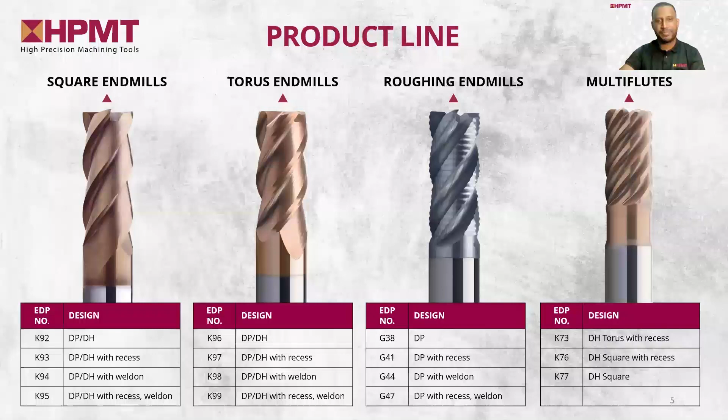This NiTiCo 45 is ideal for machining resilient superalloys, which fall under the S material group, particularly nickel-based alloys such as Inconel, Haynes alloy, Waspaloy, and Monel, as well as challenging and durable stainless steel and titanium material. Optimal results are achieved within a hardness range of 36 HRC to 52 HRC. Therefore, for any superalloy or other materials like PMK falling in this hardness spectrum, HPMT suggests utilizing this NiTiCo 45 program for superior performance.

This material, which I have mentioned a while ago, can be found in various industries, but we have narrowed down to the industries we believe use it the most. The most common is in the aerospace industries, for production of aircraft turbojet engines, particularly the discs, blades, and engine casing. For defense, in production of gas turbines, which can be found in naval vessels or patrol boats, particularly the production of propeller blades and submarine fittings. In energy, for production of gas turbine components such as scrubbers and also heat exchangers. It also can be found in medical industries, in production of joint implants, fixation screws, bone plates, knee and hip implant components.

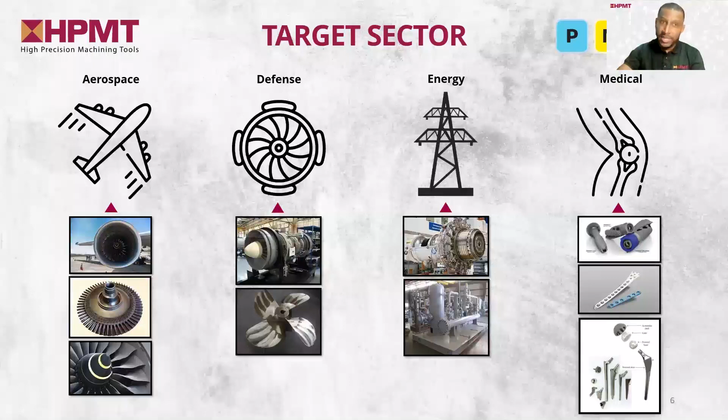Basically, all four materials are being selected, with stainless steel leading the poll. I'm happy to inform our internal testing is done based on Inconel 718 material. So do stay tuned, as we will come to that part later on.

Next up, I'll pass to my colleague Nisha, where she will share what makes this NiTiCo 45 different by diving deep into the features of the tool. Over to you, Nisha. Thanks, Mark. Hi everyone, I'm Nisha from Product Management. We'd like to explain the main features and benefits of our hero product for today, the NiTiCo 45.

Features and benefits are very important criteria to further enhance the tool's performance and efficiency in machining operations.

As you can notice, the figure on the left has equal pitch and the figure on the right has differential pitch. The first feature in this NiTiCo 45 will be the differential pitch, known as DP. Differential pitch simply means that the pitch is varied between the blades. This feature improves performance and reduces chattering during machining by breaking the resonance. Overall, differential pitch leads to enhanced surface finish and longer tool life, resulting in a smoother cutting process.

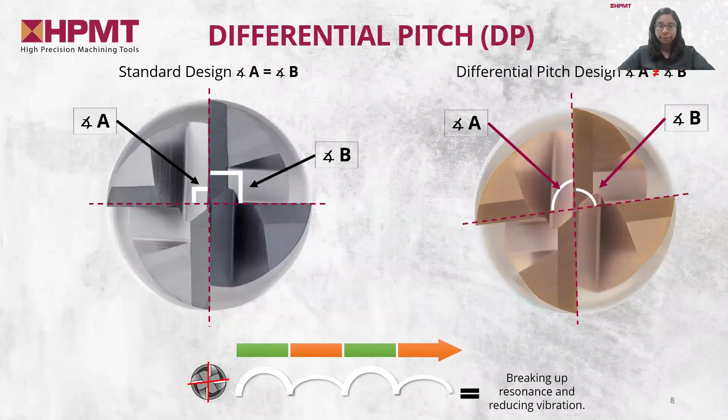Next, we will move to the next feature, which is the differential helix, DH. Jet, do you know the benefit of having DH? Well, from my understanding, differential helix or DH means there are different helix angles in one single tool. It also means that the helix angle for the second flute will be different from the first one.

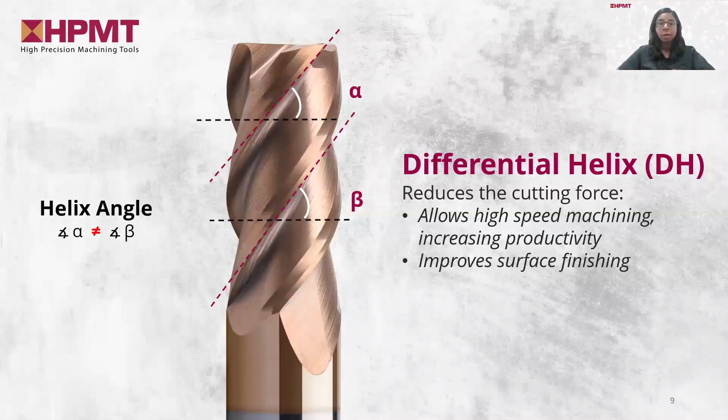Thanks, Jet, you are correct. Differential helix basically means that the helix angle varies along the length of the flutes. This feature helps in chip evacuation to prevent chip congestion, leading to higher efficiency in the cutting process. Differential helix also helps reduce chattering by breaking the resonance, promoting a stable cutting operation. Lastly, higher tool life can be achieved by distributing the wear evenly across the cutting edges.

Next, we have the ideal cutting edge, or internally we also call this feature the fake margin, because we adopted the eccentric grinding process to leave a small land width of about 100 microns at the cutting edge. This ideal cutting edge land width is larger than a perfect cutting edge. The ideal cutting edge reduces cutting force during machining, leading to stable cutting operations. The smooth and precise ideal cutting edge helps achieve a high-quality surface finish, and also helps prolong tool life and enhance durability.

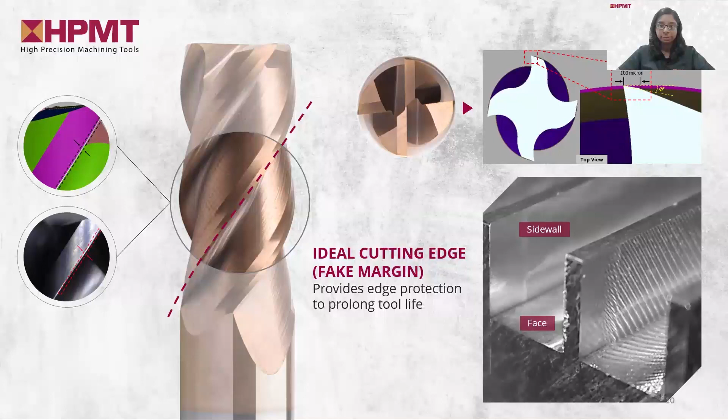NiTiCo 45 also comes with a newly improved coating formula known as B0909. This newly improved coating formula comes with higher thermal and wear resistance, and also promotes smoother chip evacuation.

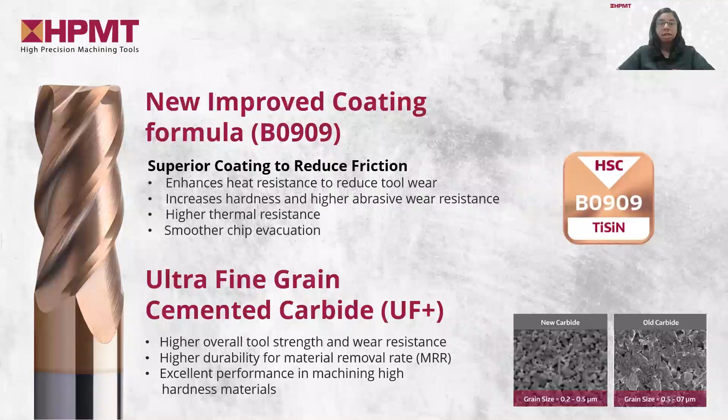Lastly, the NiTiCo 45 is made up of UF plus material. For those wondering, UF plus means ultra-fine grain cemented carbide. This carbide material comes with higher tool material strength and wear resistance. Most importantly, it comes with higher durability for material removal rate, which is a dream for all machinists. That's all on the NiTiCo 45 features and benefits.

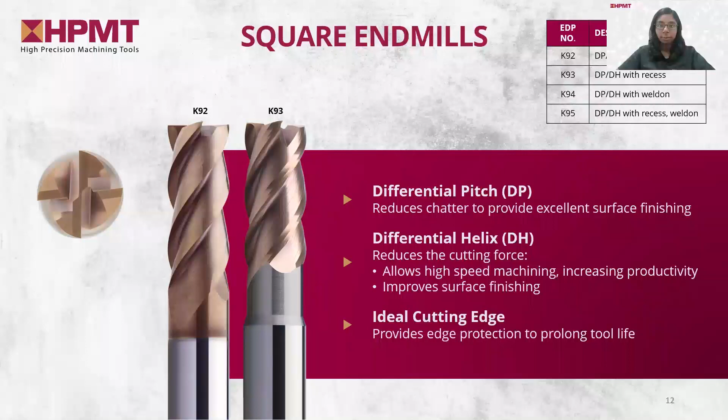Next, I will introduce the NiTiCo 45 newly launched item types. Basically, NiTiCo 45 will be introduced in 3 types. The first type will be the square end mills, which consist of 4 EDPs: K92, K93, K94, and K95. All the mentioned products are equipped with differential pitch, differential helix, and ideal cutting edge.

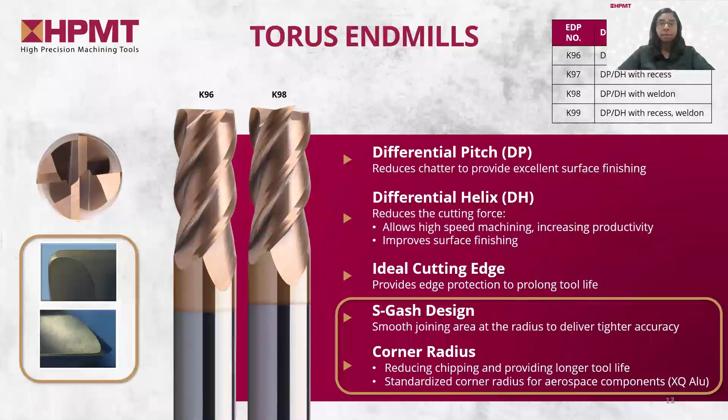The next tool type will be the torus end mills, also consisting of 4 EDPs: K96, K97, K98, and K99. These products are also equipped with differential pitch, differential helix, and ideal cutting edge, and are further enhanced with the S-gash design, a specialty to deliver tighter accuracy. The standardized corner radius for aerospace components helps reduce chipping and lengthens tool life.

Multi-flute will be the last tool type in NiTiCo 45, consisting of 3 EDPs: K73, K76, and K77, which come with 6 or 7 flutes. The multi-flute tools are equipped with differential helix only, further enhanced with the S-gash design and high helix angle. Better shearing and surface finishing with excellent chip evacuation are the benefits of having a high helix angle.

As predicted, side milling is the most common machining strategy when it comes to super alloy material. Okay, I'm not going to take any more of your time. I will pass on to Jet. Jet, take it away. Right, thanks, Mark. You can rest a bit for now. Let me start sharing our tool test results.

So here, you can see that our tool test processes are categorized into 3 stages. The first stage is more on internal prototype testing at the initial stage only, while the second stage will be the final product comparing directly with all the other competitors for both 4 flutes and multi-flute tools. Lastly, stage 3 will be a very fierce comparison with very aggressive cutting parameters between HPMT and the best performing competitor from stage 2. We will show you the results in the next slide.

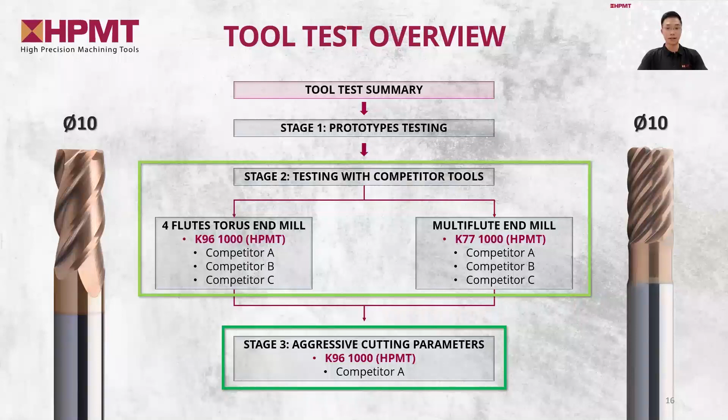Before that, I would like everyone to pay attention to the details and cutting parameters here, because it will be slightly different later in another stage. So basically, for the first test in stage 2, the material that we use here is Inconel 718, which is also widely considered a very common material in the target sector that we mentioned previously. Please be noted that our comparison coverage is wide, as we include both Europe and Asia competitors.

We will not disclose who they are, but what we can tell you is that competitors A and B are well known in Europe, and competitor C is well known in Asia. Due to multiple sites being involved here, the cutting speed, feed rate, and other cutting parameters that we selected are based on standard conventional cutting parameters that are considered quite common among all the competitors. As for the coolant pressure, it is controlled at 15 bar here. The machine that we use for the tool test is Hwacheon, a 5-axis CNC machine.

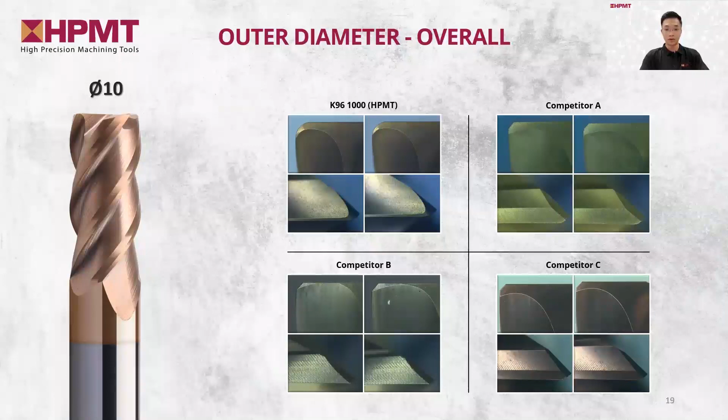Got it. Thanks for the explanation, Jet. Okay, great. So in order to compare the test result, we will always start with capturing images of all the tools before we do machining. Now, let's have a look at the condition of the tools after machining on Inconel 718.

As you can see, the difference in terms of performance is very, very significant. Competitor B is already broken at the 5th program, which is about 13883 millimeters squared covered. Competitor A and C already have very heavy wear, while HPMT's K96 is still looking great.

Here, this is also the top area, just that it is another side of it, which we call gash land. Based on the images that we obtained, the result and condition of the gash land are the same as well.

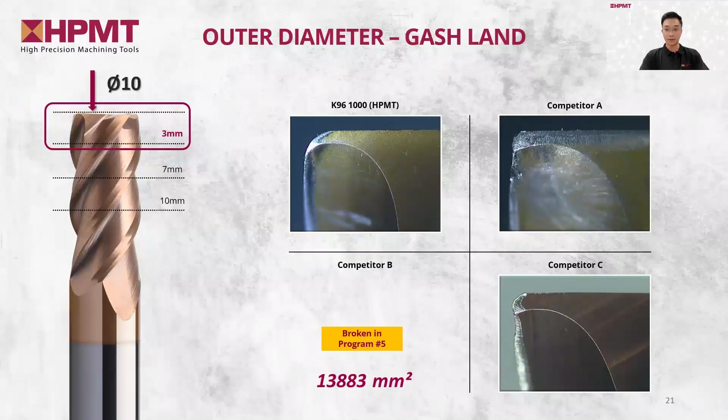These are the images that we observe on the bottom area. Before I continue, do you guys know why we separate them into 3 areas? Perhaps because we tested it for 3 times? Not really, Nisha. It is actually because we are aware that some might have doubts about the consistency across the entire tool area. So during the tool test, we observed all 3 areas, including top, middle, and bottom.

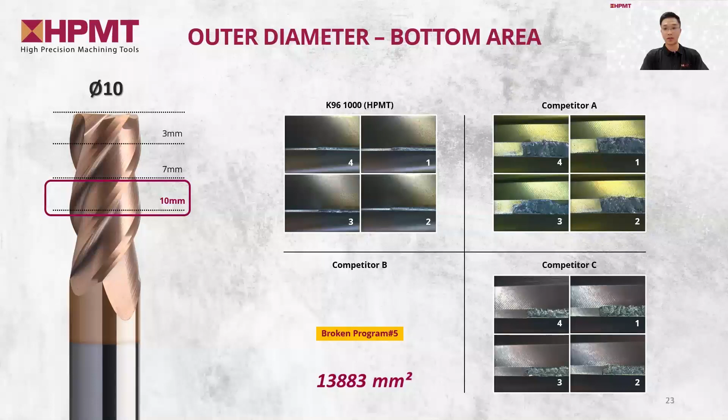So here I would say that we are very confident that after comparing them, HPMT's K96 is still the best one. As you can see, the wear difference is pretty obvious and also significant.

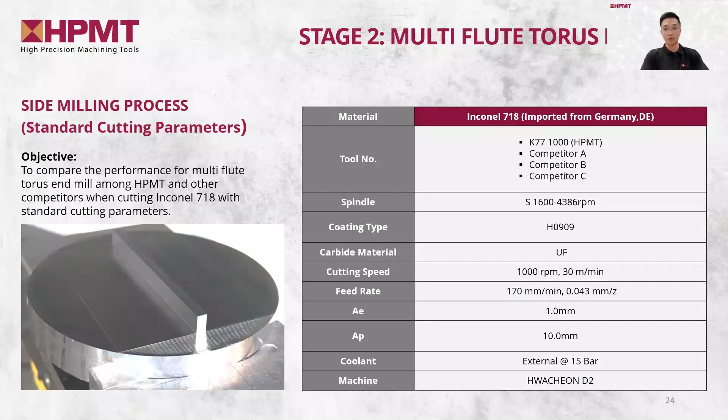Other than the torus end mill, we will also show the test results of the multi flute end mill. This is basically similar to the first test, but just with a different tool type. All the cutting parameters and machine settings remain the same.

Same machining program here: the first tool will cut from area A1 to A5, while the second tool will cut from B1 to B5, and the same goes for the third and fourth tools. Here are the images that show the condition of the tools before machining.

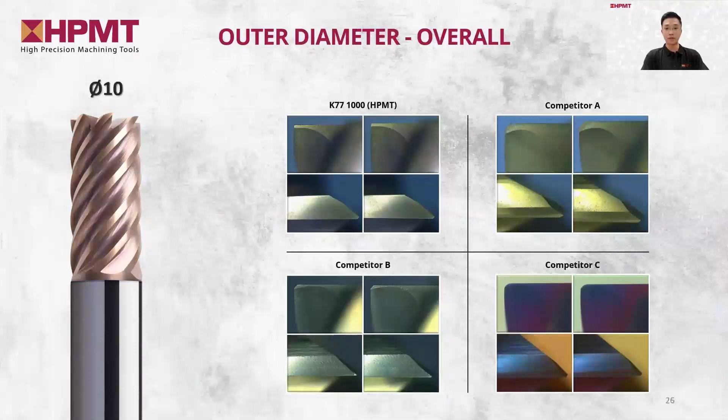In the next slide, I will review for all of you whether the performance is as promising as the 4 flutes we shared just now. All right, time to review its actual performance.

As usual, we will start with the top area first. As you can see in the top area, the difference in performance is still significant. Competitor B is already broken in the 3rd program, covering about 7986 millimeters squared. Competitor C's tool is already broken in the 1st program, only about 2519 millimeters squared.

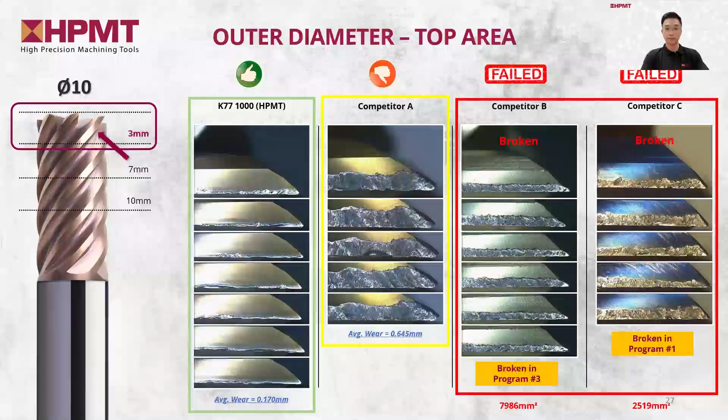So I would say that competitor A is having heavy wear, while HPMT's K77 is looking great with just some slight wear on the cutting edges. Same as what I mentioned before, this is also the top area, just that it is another side of it which we call gash land.

Based on the images that we obtained, the result of the condition of the gash land is the same as well.

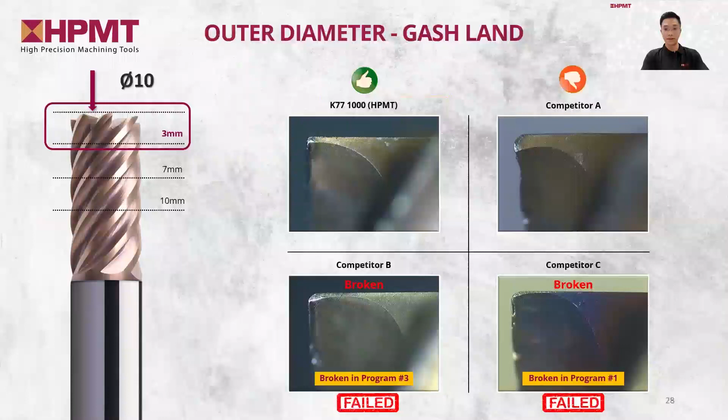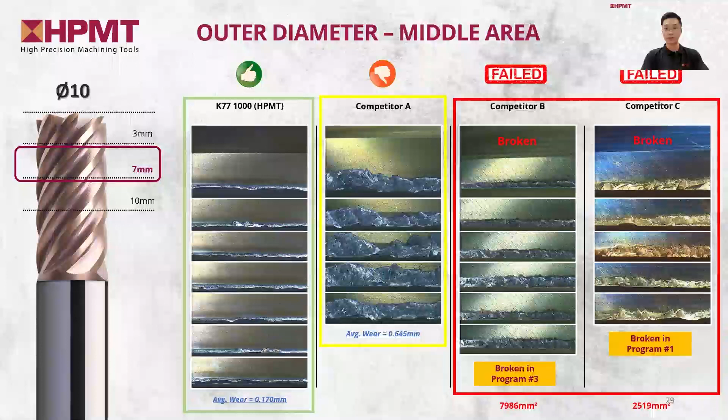In terms of the middle area, we can see that the result is the same as the top area because both competitors B and C are already broken. Competitor A has heavy wear, but HPMT has just acceptable wear condition and is able to continue machining. Same goes for the bottom area. It is still very obvious that HPMT's K77 multi flute end mill is the best after comparing among competitors.

Thank you for sharing the tool test report, but the result seems too good to be true. Is it because you're using a conservative cutting parameter, or a cutting parameter that suits HPMT tools? Yeah, Mark, I can tell that you are definitely paying attention. That's also why I requested everyone's attention early on.

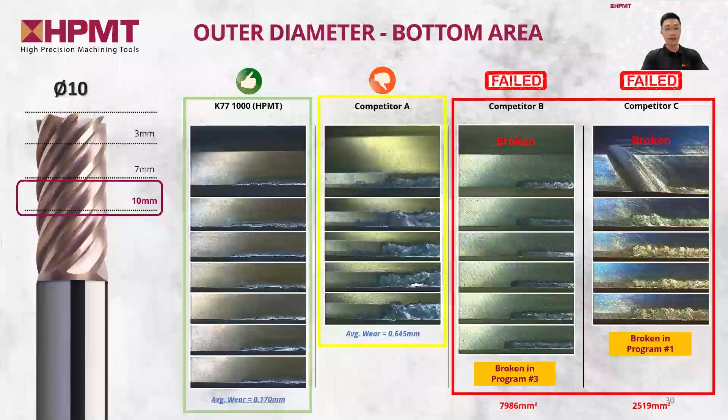Okay everyone, so from what I shared just now, we were actually only comparing with the same conventional cutting parameters that we concluded after comparing with all the competitors' conventional cutting parameters. But worry not, as in the next slide I will share more on the next stage of our tool tests. Before that, Mark, do you see any difference in stage 3?

If I remember correctly, in the previous test the cutting speed was 1000 RPM and 30 meters per minute. But here it's 1590 RPM and 50 meters per minute. That's a whopping 50% increase.

Yes, you are correct. So not only comparing with conventional cutting parameters, we also include aggressive cutting parameters to test. The reason is we understand some of you might have concern or doubt on the capability and performance of our tools under more aggressive cutting parameters. So in this stage, stage 3, we carry out two tests with very aggressive cutting parameters, and we will show you how they perform under this condition.

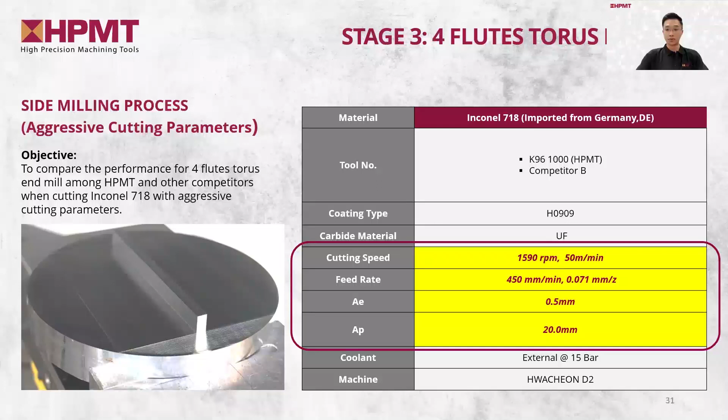As you notice, the cutting speed here increased from 1000 to 1590, and the feed rate increased from 170 to 450. But not only that, the cutting depth, or what we call AP, increased from 10mm to 20mm, which is exactly 2 times than before. So in other words, we are utilizing almost the entire cutting length for this tool under these aggressive cutting parameters. The machining concept and process all remain unchanged from previous tests. The only difference is that we changed it to the aggressive cutting parameters.

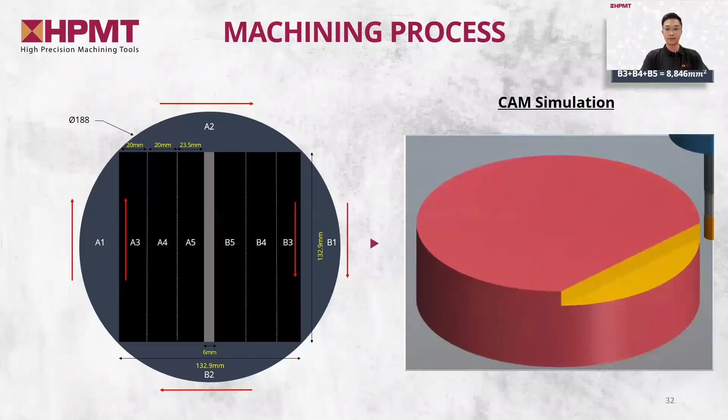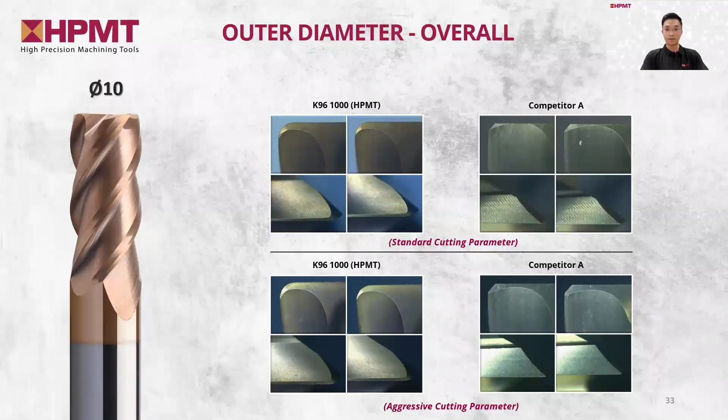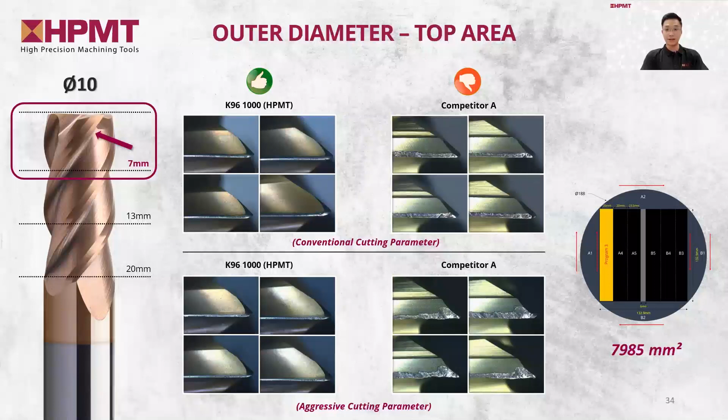For the first part, we are going to show the images and results taken before the tools are broken. As you can see from the top area, competitor A's tool has very heavy wear, while HPMT's K96 still appears to be able to continue further. Competitor A's gashland area is heavily chipped, while HPMT's K96 is still in good condition, even after all this aggressive cutting process.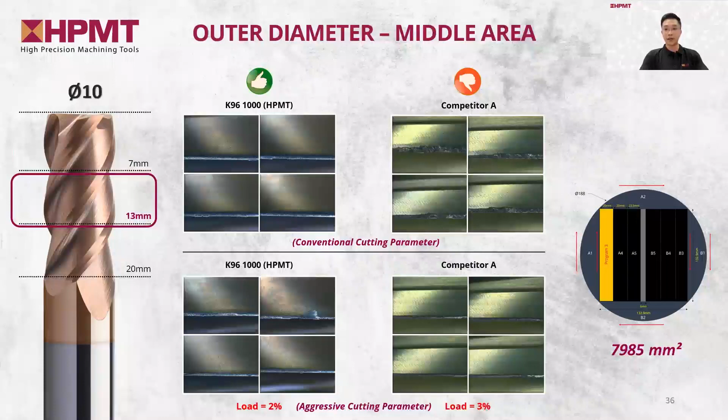In terms of the middle area, HPMT's K96 is still having a better wear rate than competitor A. Same goes to the bottom area. The wear rate of competitor A's tool is significantly higher compared to HPMT's K96.

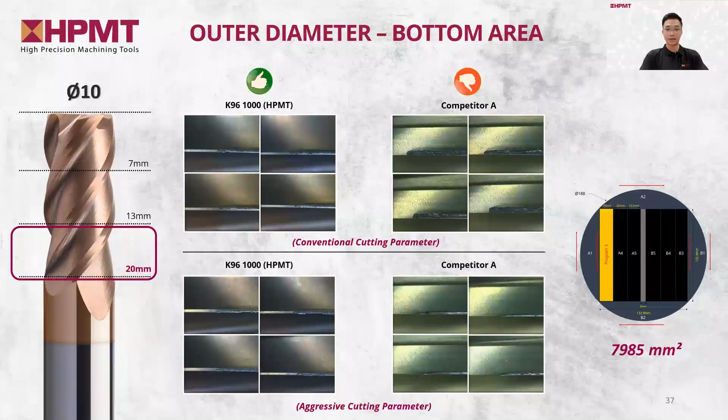For the second part of this stage 3, the tools here are continued to be machined further and aggressively until either one is broken. So it's slightly different from the first one.

Also, not forgetting to mention, we did observe the spindle load condition under these aggressive cutting parameters as well. The spindle load while using HPMT's K96 is 2%, which is lower than competitor A's 3%. This also means the machining process is smoother and causes less burden to the machine.

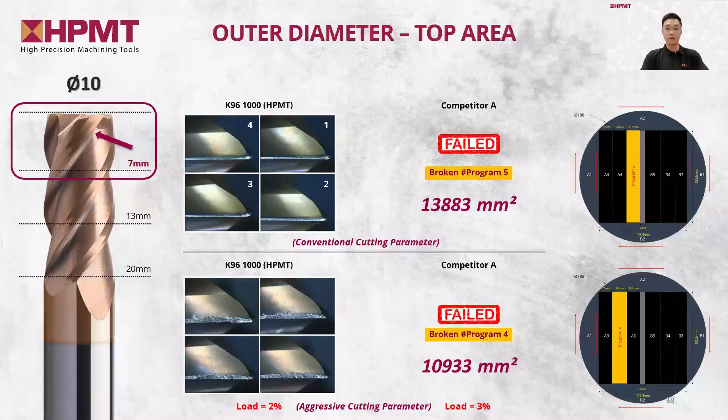Under this extreme and aggressive circumstance, we are very confident to say that HPMT appeared to be the clear winner, as competitor A's tool already broke first at about 10933 millimeters square covered, while HPMT's K96 is still in a very acceptable condition and able to continue machining even after running all 5 programs, which covered about 13883 millimeters square.

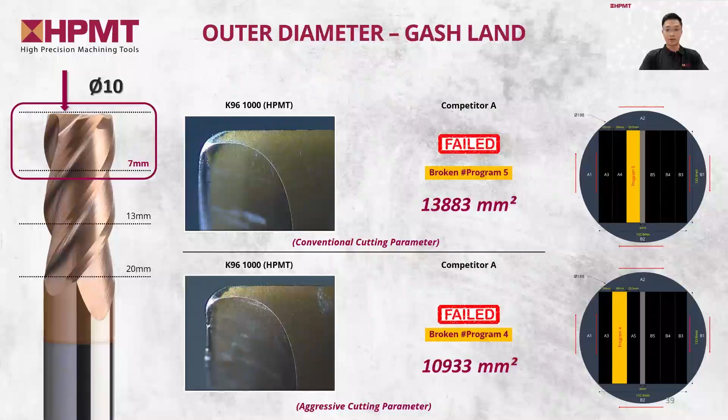So to summarize the 2 tests I have shared just now, I can say that HPMT's 4-flute end mill and multi-flute end mill are the best performers under standard conventional cutting parameters among all the competitors. As for aggressive cutting parameters, HPMT is still the clear winner here, as competitor A's tool already broke faster even when HPMT's K96 is still able to continue machining.

Okay Jet. Yes Mark, you were saying something?

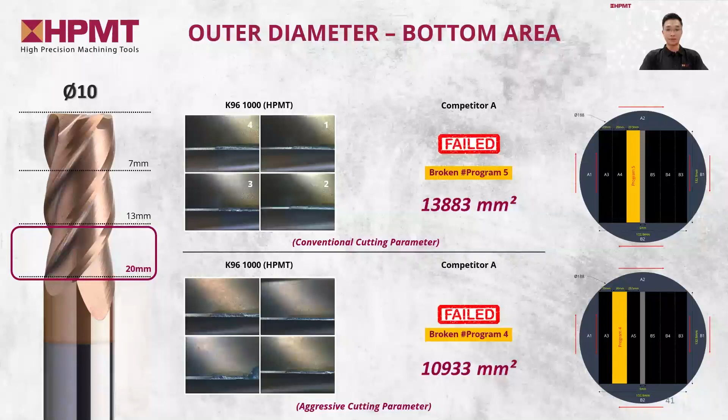Yeah, in terms of tool durability, HPMT tops. But what about the surface finish, as it is a critical component, especially when it comes to the aerospace industry?

I agree, this is a good one, Mark. I believe everyone here actually has something similar in mind as well, right? Let me show you something in the next slide.

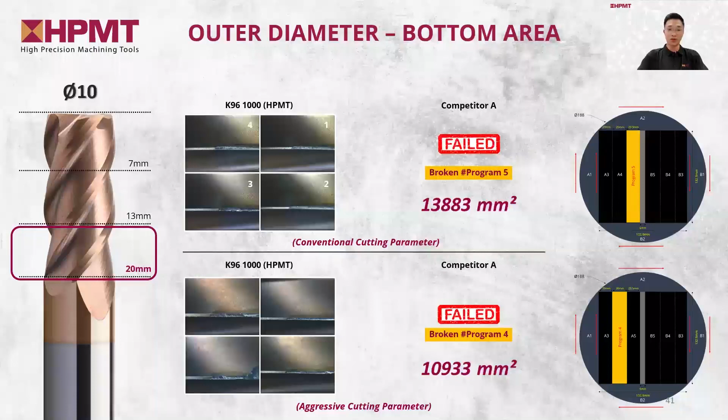I'm going to answer on behalf of the audience. Yes, it's pretty obvious. Yeah, I know, right? But do you know what it actually means?

I've no idea. Is it because of the chattering marks due to heavy vibrations?

Not bad, Mark, you are right. I believe some of you here are quite familiar with this, but for those that don't, please allow me to explain a little bit.

Technically, this is actually caused by the wear of the cutting edge. When the cutting edge of a tool wears, the vibration is much stronger and the surface finishing will be critically affected. This is why you can see a very obvious white mark on competitor A's surface finish.

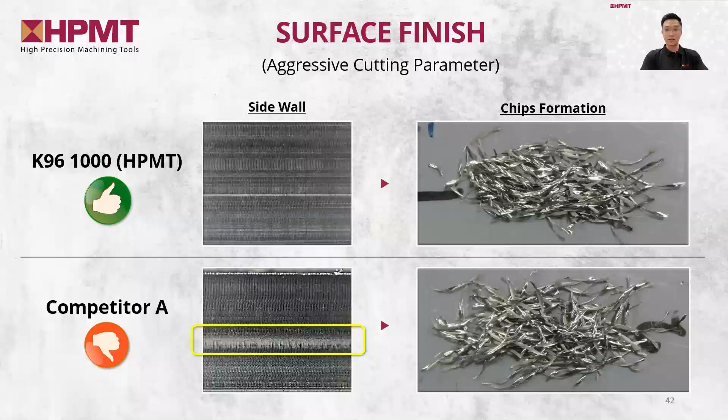Last but not least from me, I have a video to let all of you visualize better the actual machining process on Inconel 718 material.

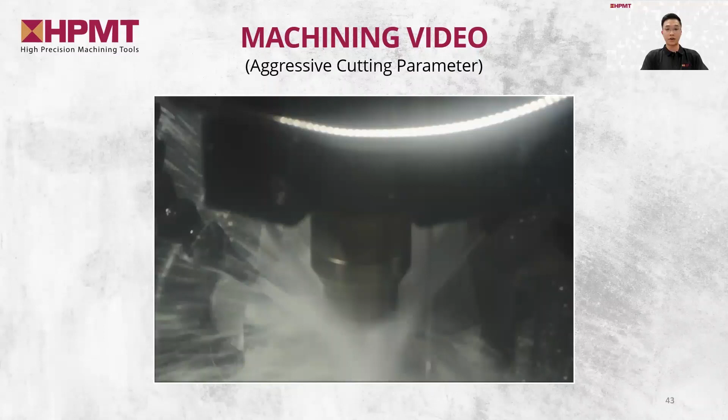Alright, so I think that is all from my side. I hope my sharing can let all of you understand more on the NiTiCo 45 series tools. Now I will pass back the floor to Mark for our next and final poll. Let's go, Mark.

Thanks a lot, Jet. I definitely learned a lot myself from your sharing, and I hope everyone did as well. Next up, I will hand over to my colleague Nisha, where she will share more on the product overview of our NiTiCo family. But before that, as Jet mentioned, we have our last poll for today.

For the last poll: from your experience, who do you benchmark when it comes to these tough stainless steel and super alloy materials? For this poll as well, you can answer more than one. If you have more than one benchmark or comparator, you can select them.

I see there are some fill-up as others. For others, we will connect with you offline to understand who are your competitors. For now, we just focus on the main 4 competitors which we have given as an option: Guhring, Franken, WNT, and Fraisa.

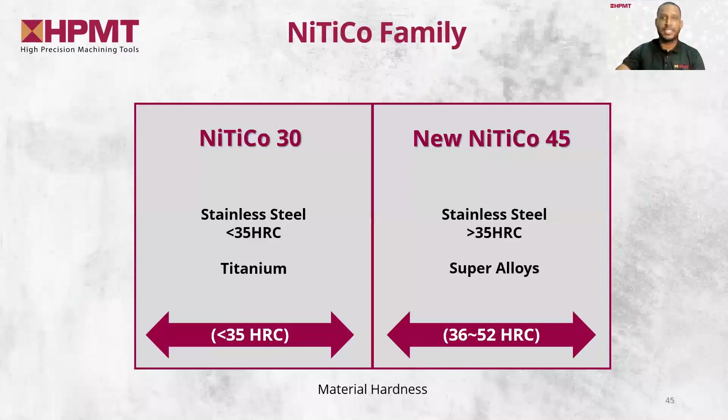Thanks, Mark. HPMT has 2 product lines, well known as NiTiCo 30 and NiTiCo 45. In today's webinar we'll be focusing on the NiTiCo 45. You can further engage with our sales team if you're curious on NiTiCo 30, which covers the lower range below 35 HRC. Our new NiTiCo 45 has a cutting range from 36 to 52 HRC.

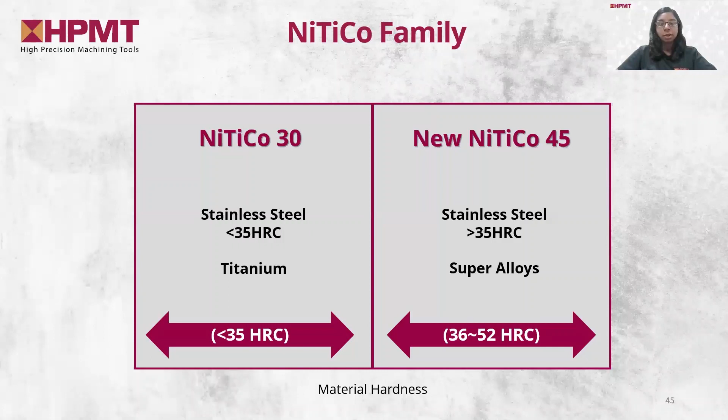Our new NiTiCo 45 is a suitable tool to be used on stainless steel and superalloy material. Also, the NiTiCo 45 can be classified as a high performance tool.

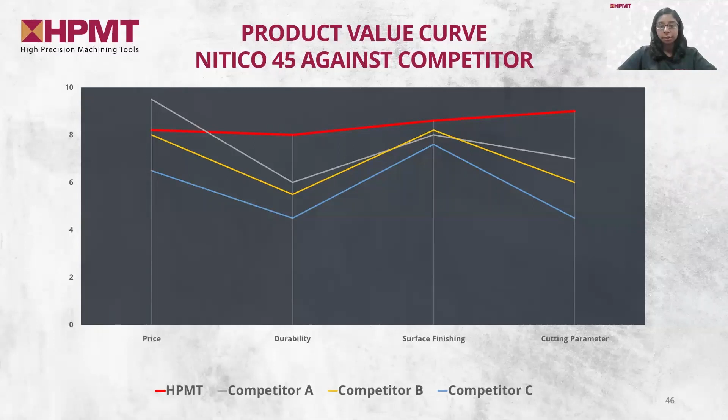Over to you, Mark. Thank you, Nisha, for sharing on the product overview. For some of you who don't know, our NiTiCo 30 is one of our focus products and it is actively being purchased by many of our partners.

It is available ex-stock, so if you haven't tested or adopted it yet, I suggest you give it a try together with the new NiTiCo 45. Just a recap: the NiTiCo 30 is for 35 HRC and below, and NiTiCo 45 is for between 36 to 52 HRC.